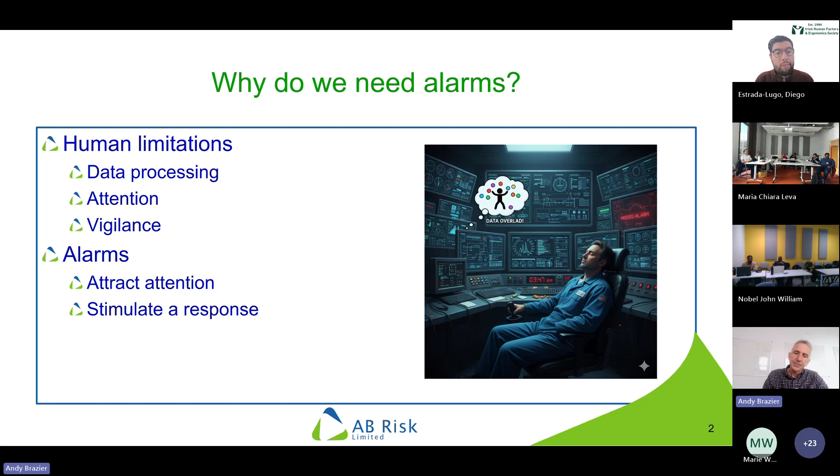Now, they sound like a great solution, and they can be, but as I say, my background, where I do most of my work as a consultant, is in oil, gas, chemical type industries. These are complex, and they are very hazardous. We have unfortunately managed to have big accidents that have killed many people, tens of people, even thousands. If you look at Bhopal, from a chemical release, unfortunately many people died as a result of that.

We have some quite sophisticated technology, and this is where those human limitations start to apply. There's a lot of data. Our technology creates a lot of data, and it's basically too much for one person, or even a team of people, to handle. So we need to think about how we present that information, and alarms are a big part of that. But we've got lots of examples where we've got that wrong, and where an alarm that's been set up in theory to help the person operating it has actually made it worse.

And one of the more recent examples is this refinery fire in the US, the BP Husky, only in 2022. Two fatalities, unfortunately, as a result of this fire and explosion, and they happened to be brothers, Ben and Max Morrissey. They were working on the site together. And what we found in the investigation was that the process had been upset. There'd been an event that meant it wasn't operating as it should, that caused a whole load of problems.

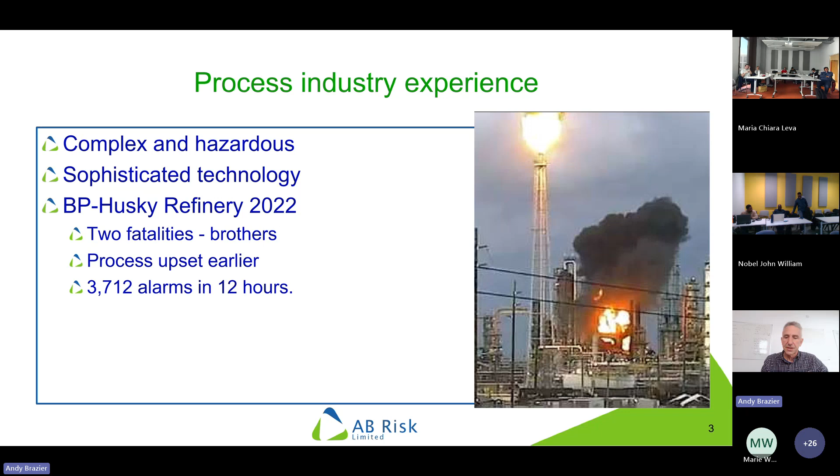But when we looked at what had been going on in the intervening hours, there'd been 3,700 alarms in that 12 hours. So that's over 300 alarms per hour. So these alarms that we've set up to help the operator, I think we don't have to be human factors experts to realize that dealing with 300 alarms in an hour is just not manageable. So instead of preventing this sort of accident, it has probably contributed to it in some way.

And unfortunately, this isn't the first example of where we've had problems, and ironically, a lot of those problems stem from the fact that we've created alarms because we've recognized human limitations, but we've then designed them, implemented them, managed them in a way that actually makes those limitations an even bigger issue. So actually alarms, especially if they're unnecessary or nuisance alarms, become a distraction. The alarm keeps going off. Something that should have been helping the operator actually distracts them from something more important that they were dealing with already.

If we don't manage the rate that they occur, the person becomes overloaded. We call this an alarm flood, so the number of alarms occurring in an hour, or we tend to look at a 10-minute period. If you're getting more than, say, 10 alarms in 10 minutes, it's almost certain that the operator can't deal with them, or certainly not deal with them effectively. And if it carries on for any longer, they're just fully overloaded.

And often it causes confusion as well. Some of that is just the way the alarms are described. We find it's maybe an engineer who decides how to explain the alarms, but they use different terminology, different language to the operator. So the operator sees an alarm and says, I don't really know what that means. So that sort of confusion. Or sometimes they get an alarm and it doesn't seem to match what they're seeing elsewhere or other sources of information that they're using. And so the alarms, which should have been focusing attention, actually become a cause of confusion. So it's a clear sign that we haven't set these systems up properly.

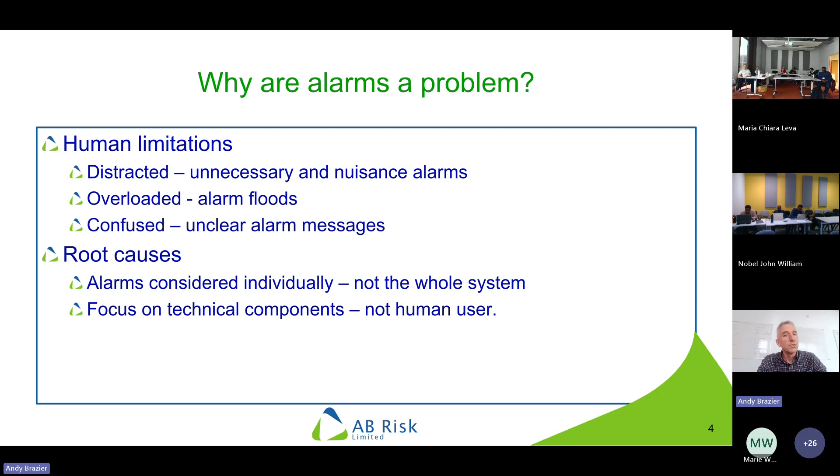And so I say, in the industries that I work in, we've recognised this, and it's not new to us. So we're talking over 30 years since one particular accident in the south of Wales in the UK, the Milford Haven refinery fire. In fact, we were very lucky that day. No one actually was killed. Some injuries, but it did do a lot of damage, including to the Milford Haven town centre. The shop windows were blown in as a result of the explosion. So we can't see it as a success that no one died. It was just a matter of luck.

But when you looked at it, again, it was one of these alarm floods. Something started to go wrong, and alarms were coming in so quickly they couldn't even be displayed. As soon as they appeared, another one would come along and they'd be disappearing off the screen. Well, when we looked at it, there was one particular alarm that if the operators had seen it, they may have realised what was going on. But that was one alarm out of hundreds, and so it wasn't realistic. I'm sure some people probably did start to say, well, why didn't the operator deal with that alarm? Well, the answer is they had hundreds of other alarms to deal with as well.

So yeah, it's not something new to us. Unfortunately, we're still having these problems. But just to show there is some history there. If you're working in a different industry, people might be surprised that alarm management is even a topic of discussion, when I say we've got 30 years of discussing it so far.

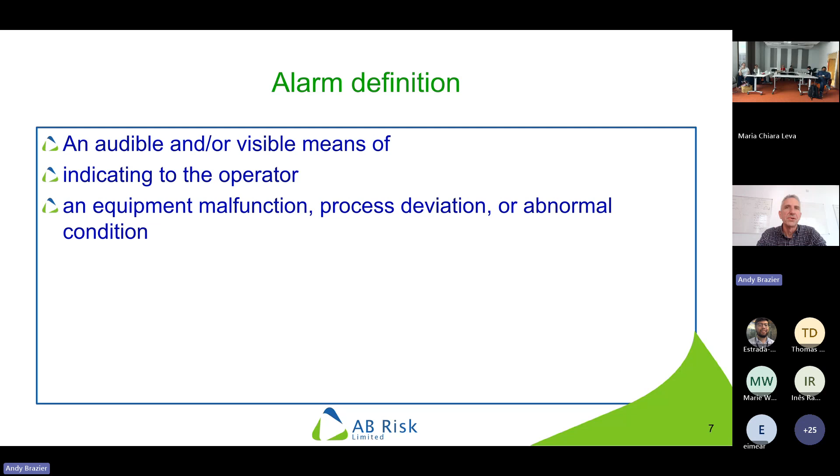All the time. In our case, an operator presses a button to open a valve and they get an alarm to say the valve's opened. Well, that's not a problem. That's what they wanted to do. Alarms should be there for things that are going wrong.

And I would say it's the last line of the definition that's most important, that that event, that audible or visual indication, requires a timely response. And if an operator, or whoever you decide is the user of the alarm, doesn't have anything to do as a result of receiving that alarm, it definitely shouldn't be an alarm. And if it doesn't need to be done relatively quickly, again, it shouldn't be an alarm. It might need to be something else, but it definitely shouldn't be an alarm.

And our rules of thumb in our industries are that timely would be within 2 hours, and that would be a low priority alarm. If it's within about 20 minutes, it'd probably be a high priority alarm. Other industries work differently. In the water industry, instead of 2 hours, it might be 2 days, just because of the nature of their processes. In an aircraft cockpit, we might be talking seconds, which wouldn't be realistic for our control rooms, but the industries are different.

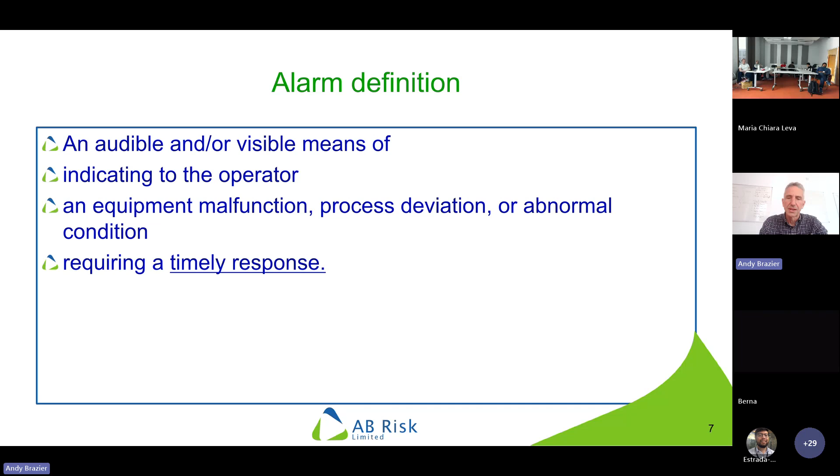But I'd say the key thing is if there's no timely response from the operator, we shouldn't have an alarm there in the first place. And that's one of the fundamental things that we find is wrong with alarm management. Just to say, there are other things as well that might crop up. You might want to have different terms. So we have this term an event.

So those are all the things that tend to happen. And the danger is we have alarms for every event that occurs. So I just said, opening a valve is an event. Most of the time, that shouldn't be an alarm. It doesn't satisfy the definition. We'll still record it as an event for other purposes, but we shouldn't have an alarm. We might have something like an operator prompt. So it's something that requires a response, but it's not critical.

Typically, we might have some piece of equipment starting up and it goes through various stages, and there'll be a point where we need the operator to go and open a manual valve. So they'll get some sort of indication that they need to go and do that, because that piece of equipment isn't going to start until that valve's been opened. But if they're delayed in doing that, there's no problem with it. There's no safety concern. So that's why it's not an alarm. It does require a response, but it's not critical.

It's a bit like we get so many beeps, don't we, in the house now, that your microwave will beep at you when it's finished its timer. It sounds like an alarm, but really it's just saying, well, if you want to eat that hot meal, you need to go and open the door and retrieve it. It's definitely not an alarm. It's just a useful reminder that you've got something to do.

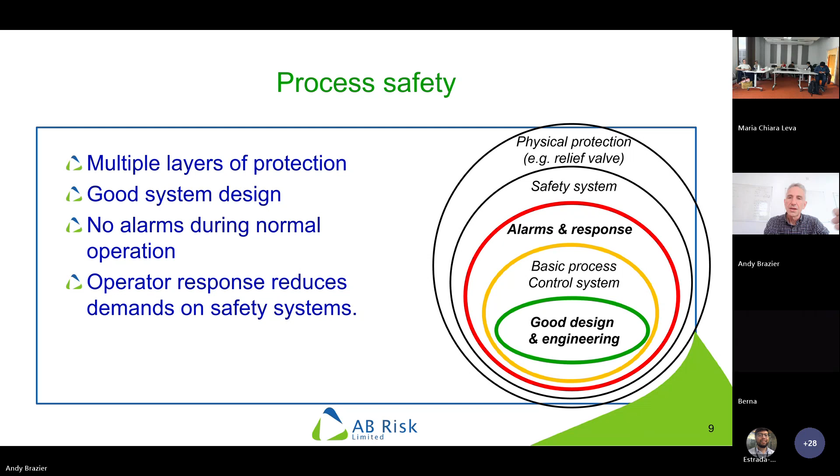So you can see a highly managed alarm is where we don't have those extra layers of protection. And that's why it's a situation we don't like to be in. And I can see that other industries may be in that more often. But I'm just trying to say that really you do need to have some layers of protection on whatever you're doing, and the better you understand how that works in practice, the better able you are to have an alarm system that works effectively. So I'm just going to show a very simple example of how this has emerged, really how we've got to where we are in our industry.

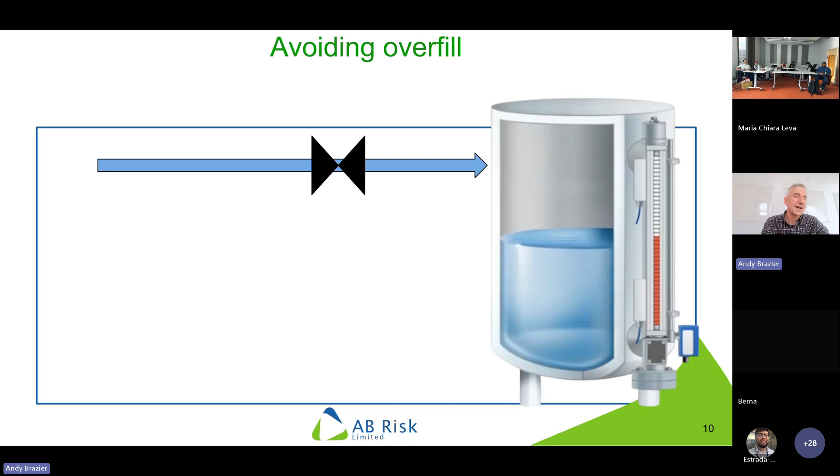So we would have started when we have tanks to fill with liquids. Let's assume it's a toxic or flammable liquid that we don't want to spill. So we would have had a tank with a level indication. That's the thing on the right hand side that's red and changed to white. We would have had a valve. It's like your tap at home. You turn the tap on, the liquid goes through it, the tank level would have gone up and you close it. So we had an operator there to do that manually. Simple, fairly reliable, but as I say, people have their limitations.

And no doubt we came to a situation where every now and then the operator would get distracted, forget about what they were doing. They may wander off, the tank gets overfilled. We've got a problem because we're relying on the operator. So what happened was we started to put alarms on. Okay, so we recognise the operator might make a mistake. Well, that's good. So now we've got an extra layer of protection. We put an alarm in place. That should make life safer. And actually, I'm sure most human factors people are looking there going, well, I can see maybe why it didn't. So instead of it being a layer of protection, that then became the control system.

So the operator said, well, I don't need to stand by here anymore because the alarm's going to go off and it'll tell me when I need to come back and shut the valve. So something that we thought would make our life safer, because not only are we relying on the operator, we've now got this alarm to help, in some cases actually made it less safe because the operator wasn't doing their job anymore. They were going off doing other things. Nothing's ever going to be 100% reliable. So we've actually had cases where we had more overfills instead of less.

So the point there was, okay, we're recognizing that maybe one of the reasons is we've got two operator actions there; although there's two layers, they both rely on the operator to act. So maybe we should take a different approach. We'll get rid of that alarm and we'll just have a second valve, which will close automatically. So instead of telling the operator they need to go and close the valve, it would just close automatically. And maybe we can make that work, but it is still relying on the operator to do their bit first.

And typically, whenever we make some change like that, the behaviours do change. And again, we found that what tends to happen then is the automated device, the second valve, starts to be used more frequently than it should be. It can't ever be 100% reliable. So we then get back into the situation where we're using the automated system more than we should have done. It's not reducing the risk as far as it should. And so we end up with a situation where we say, okay, we need to put the alarm back there.

And the distinction there, though, is that the alarm is not really there to protect the operator. It's there to stop the operator relying on the automated system. We need the discipline, though. We always need the discipline for the operator to do their bit. They're the controlling function. The alarm is there if they haven't done their bit. And if that still doesn't work, we've got the automated system. So the point here is we've got 3 layers of protection: the operator, the alarm, and the automated system, and that's how we achieve our levels of safety. And that's what I mean when we say different layers of protection.

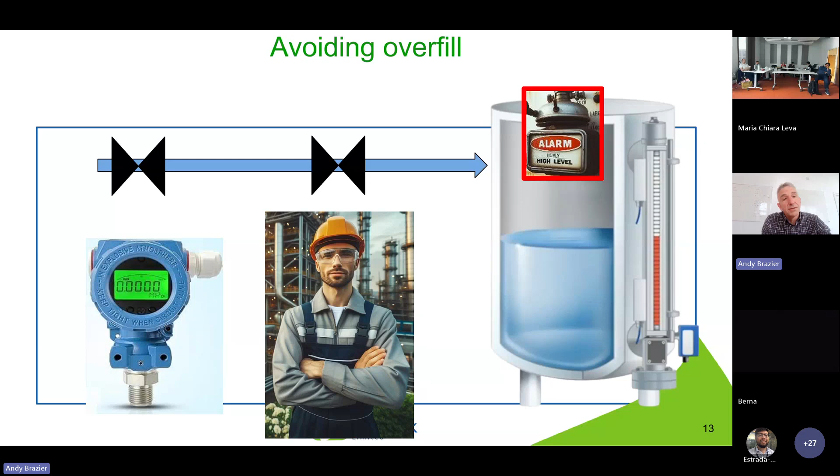So this is the typical setup now in a lot of the process industry. Typical. That's what you would find. That combination. And again, you may well not be able to have those sorts of setups, but then you need to recognize, is that a risk that you need to manage in a different way? But what happens is we have a lot of parameters on our process plants; there's lots of things that we can put alarms on. And that's the problem that we often have, is we just end up with alarms on everything because it seems like a simple solution to a problem.

So we do need to quite regularly go through a process of what we call alarm rationalization. That is to look at every alarm configured on a system, every alarm that an operator may well receive. And the first question is always, should we even have an alarm there? I would say timely response is usually the first question to ask. Does this require an operator's timely response? So the first thing we always ask is, what's the operator going to do when that alarm goes off? And surprisingly often we'll find, well, there's not much they can do. Okay, so it shouldn't be an alarm, it should be deleted.

We might well say, well, what else should it be? So I've talked about alerts, I've talked about prompts. That's part of the process, and we should be reviewing that on a regular basis. Also, what are the settings on it? How long will the operator have to respond? So on that tank filling example I just showed you, if it's going to overfill within a couple of seconds, that's not enough time for the operator to respond. So we always need to make sure that the alarms are set correctly as well, because it's not fair to the operator if we give them an alarm and they haven't actually got time to do anything about it.

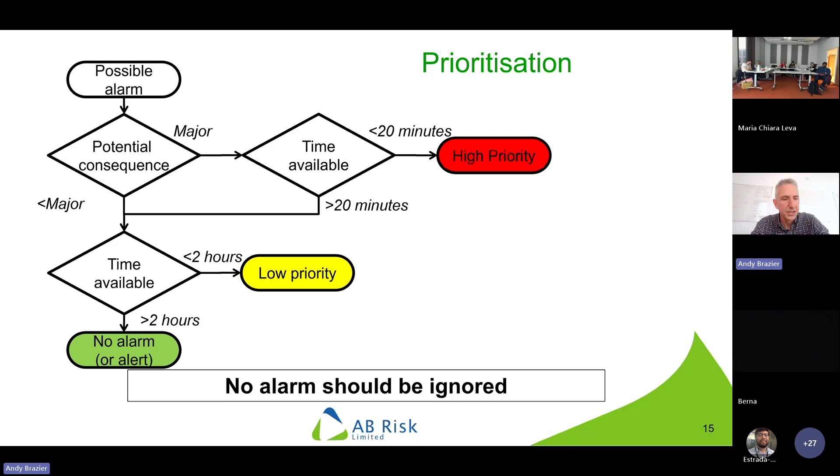So we've got 2 alarms. If one of them is a high priority alarm, they should be dealing with that one first and then moving on to the low priority alarm. If they've only got one alarm active at a time and it's a low priority, they should deal with that immediately. That 2 hours isn't, oh, you can leave it 2 hours before you respond. No, you should still be responding immediately. And that's really an important thing to get over. That every alarm should always be responded to immediately.

So really, just reaching the wrap up, but it's kind of a reminder that alarms are for people, and I say people like me, engineers, have a habit of seeing them as a technical thing. There might be some technology sitting behind it, but it's for the person that the alarm has to be configured. They're there to mitigate those human limitations that I recognise, and some of that is human error. That we miss things, we misunderstand things.

We've got to recognise that a violation, depending on how you want to define it, but people can choose to ignore alarms, and that is part of the process. And we need to recognise that alarms often get missed just because the operator is bombarded with them, or they're just badly configured. So, whether we like the term violation or not, we do set up operators so they have to ignore alarms quite often.

I would also say, though, although I've mentioned it several times about the limitations, we should also recognise that humans have amazing capabilities, a lot of which still aren't being replicated by the technology that's available. So we're very good at perceiving things, what's going on, taking information from many different sources. So an operator, when they're receiving an alarm, it's not just the alarm that they're working from. They're looking at the alarm, they're going to find some other data sources.

They're thinking about, what was I told at my shift handover? What's that maintenance team doing out there? I saw something like this 3 years ago. What do we do about it? They've taken on all that sort of information and are trying to say, well, is this a similar pattern to what we've seen before? And they've taken on those data sources.

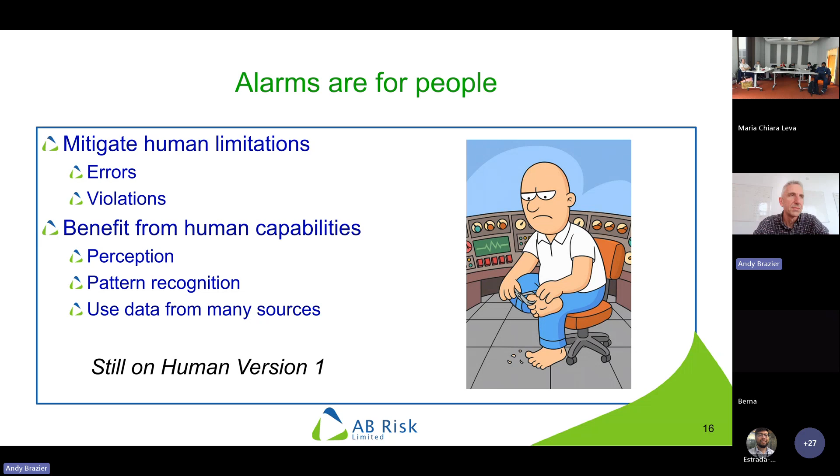But equally recognizing we're not evolving as quickly as technology. And unfortunately, as technology's improved, it's tended to make these things more difficult for the operator, which is a shame, really, because the technology does give us some great potential if we use it properly. And just to emphasize that it's a management process. The old plan, do, check, act should be what you're aiming for. So the plan is you've got to have that definition and a philosophy document. You've got to have a plan, people, commitment, resources put in place to actually do this.

Putting it into practice, I'd be looking at those layers of protection. Maybe you call them something different, or they're set up differently, but you should be thinking about where do alarms fit into the grand scheme of things, and making sure that whatever you do is there supporting the user, supporting the operator. You need to be looking for evidence to say, is it working? So KPIs, if you have incidents, do the alarms contribute in some way? And also asking the users, are these alarms helping you, or are they making your job more difficult?

And recognizing that you're probably going to have to improve, and alarm rationalization is probably something that you're going to have to go through on a fairly regular basis. And you'll learn from that. You update your philosophies, everything else. So that's what I was planning to go through.